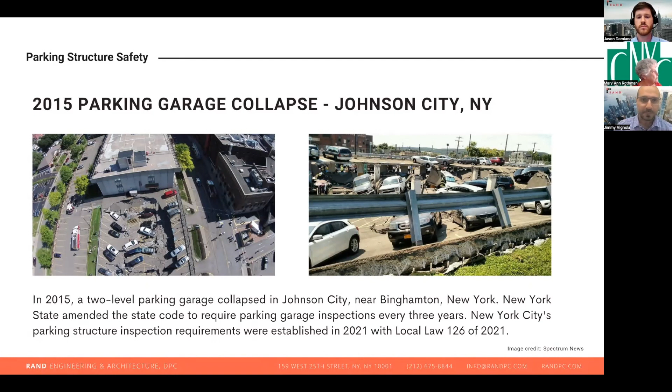So back in 2015, there was this collapse here in Johnson City, near Binghamton in New York, and this incident prompted New York State to institute a law requiring that all parking structures be inspected every 3 years. Those inspections in New York State rolled down to New York City, and eventually New York City put their own law in place to also require the same thing. So any garages outside of New York City are also now required to be inspected by a qualified person on a regular basis.

That went into gear in 2015, and all garages at that time were required to have an initial inspection, and then every 3 years after that. So every garage in New York State should have had their initial inspection by 2021, and they have to maintain this permit to operate. There are some exceptions: 1 and 2 family houses, townhouses, and parking lots.

The rules of the inspection program are very, very similar to New York City. We'll get into those. But one major difference between the city and the state is there's no state authority that we submit these reports to. They have to be submitted to the local authorities, like the village of Elmsford or the city of New Rochelle. They might have different rules and regulations between the towns in New York State.

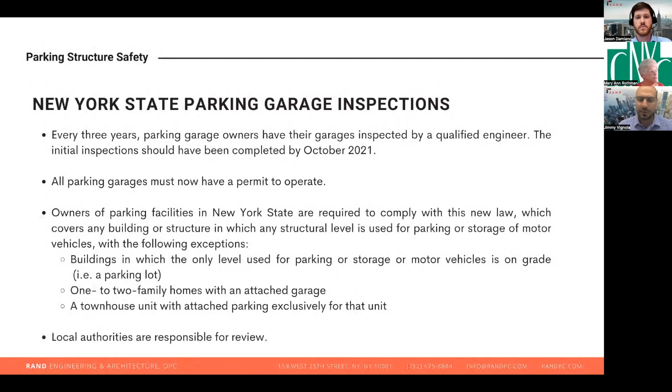I can't say we have experience with all of these agencies outside. There are many of them outside of the city, but we've done a handful of these inspections, Dobbs Ferry, Yonkers. So we're happy to help with those. But basically, the idea is the same as the city.

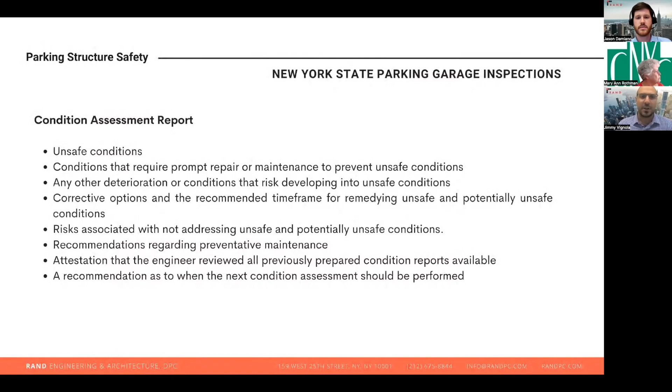At the end, we have to identify unsafe conditions. We have to identify and make recommendations for repair and maintenance. We have to give a time frame for those repairs. We have to assess risk and talk about the previous report and make sure that anything that was required by a previous report has been done at the time of the follow-up inspection of the second cycle. So very similar at the end to New York City.

So the New York City program, we have begun referring to this, the New York City Periodic Inspection of Parking Structures, as PIPS. That moniker is kind of coming in. A lot of people are still calling it Local Law 126, but New York City DOB is now using this PIPS moniker, similar to FISP, although they didn't put the program in this one, but more and more, I think you're going to start seeing PIPS, and it's definitely taking over in our office.

So I mentioned the Local Law 126. I know a lot of people are asking for a Local Law 126 inspection. Local Law 126 actually was the local law of New York City that instituted the entire 2022 New York City Construction Code. So it included the building code, the plumbing code, the mechanical code. There was a new article, actually in the administrative code, that instituted the parking inspection program. So 126 is a much more far-reaching local law than just referring to the parking inspection program. So DOB is bringing in this acronym, so we're adopting it.

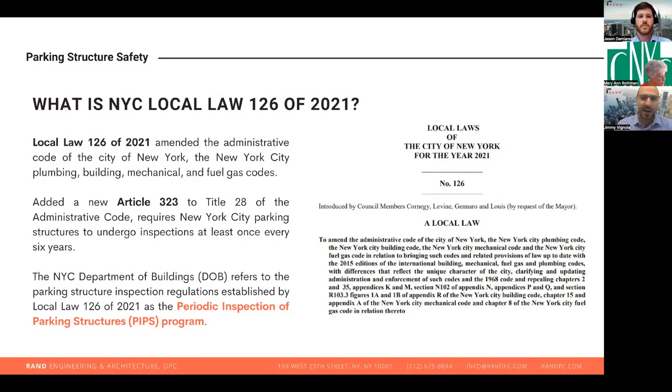So what does the law affect? Which parking structures are affected? Essentially, all of them. If it's in a basement, it's included. Any type of standalone garage is definitely included. Doesn't matter if it's open or enclosed. A lot of these parking structures don't have exterior walls. They're kind of partially enclosed. All of that is included. So any building or a portion of building, such as a cellar, basement, that's used for parking motor vehicles, is included.

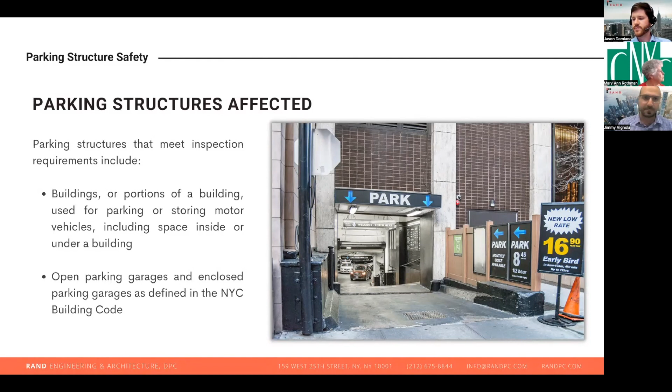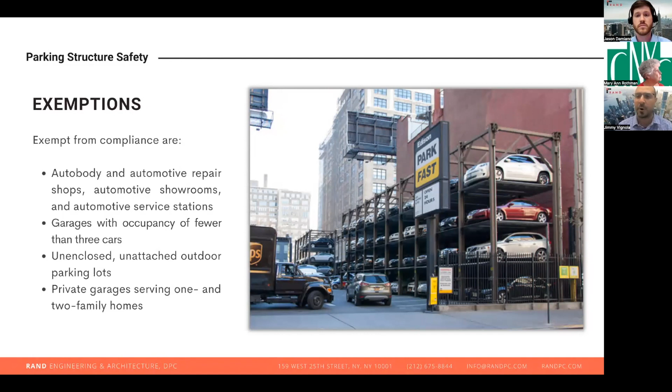So what's exempt? Auto body shops and auto repair shops are exempt. Garages with fewer than 3 cars are exempt, so 1 or 2. Parking lots, like the one you see pictured, are exempt. They do not need to be inspected, even if they have these mechanical lifts in a parking lot. 1 or 2 family homes are also exempt, as well as loading docks. We recently found out that loading docks are exempt from this, even if you have parking for 8 vehicles.

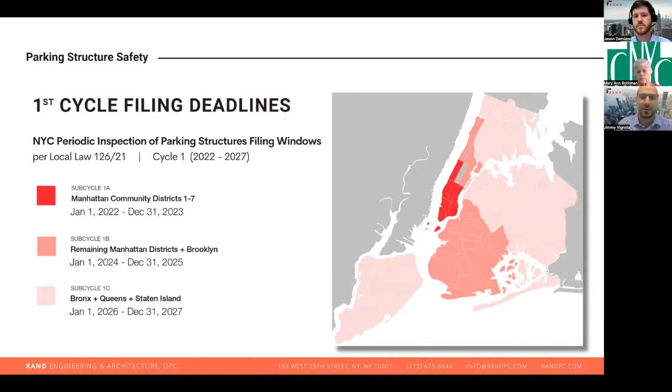If there is new construction in these areas, we always get the question, do I need to file? You need to file. All parking structures need to have an initial inspection within 6 years of their initial TCO or CO. So if you have a new construction and that 6-year window falls within the filing window associated with the location, you do need to file. If that 6-year date falls beyond your window, you don't need to file. So basically, for an initial filing in the lower Manhattan area, your initial TCO would have to be in 2017 or earlier for you to be required.

So it gets a little tricky there, but if you have a question, you can feel free to contact us and we will help you sort your way through it. But the key is the date of the first CO or TCO, and then 6 years from then, are you in the filing window or not? If you pass it, then you'll file cycle 2.

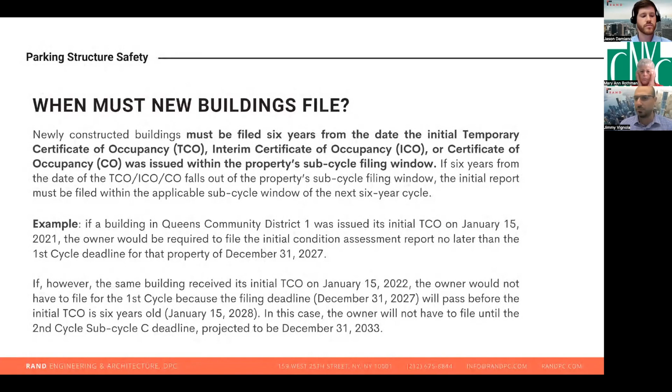Some of the rules and regulations, right? The rules of the City of New York is the place where most of these things reside: what the inspection program requires and the report. So every 6 years, right? The most important thing is that the person doing the inspection is a qualified parking structure inspector. We call them QPSI. Jason is one.

So this is the key. Even if you didn't want to come to RAND, please make sure that whoever you were talking to is a QPSI. That is the most important thing. The DOB vets us when we apply to be a QPSI. You need to have 3 years of experience with parking structures specifically. You need to submit your resume.

You need to give them a list of drawings, a list of projects that you've worked on, and then there is an interview with multiple people from the DOB. They grill us about our experience and what would you do in this situation. So it's something that you have to work for to actually get this qualification. So make sure whoever you are talking to is a QPSI. If not, the report's going to get rejected and it won't be worthwhile.

So the QPSI must put together this condition assessment report. The bottom line of the condition assessment report is that we classify each parking structure as safe or unsafe, or the middle category, which is where we normally wind up, is safe with repair and/or engineering monitoring, SREM.

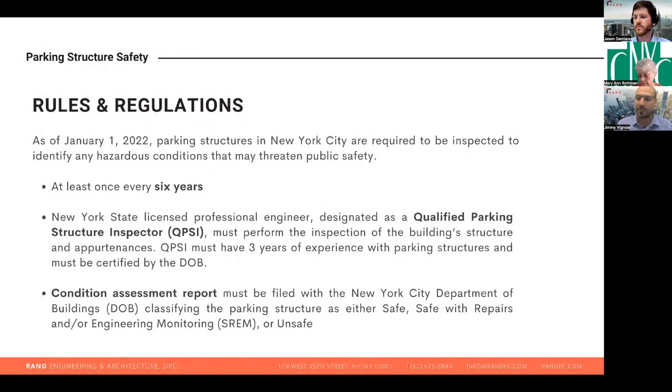This is very similar to SWARMP if you're familiar with the FISP program, which most condos in Manhattan, New York City are. So a lot of similarities with the FISP program. I'll refer to it a lot, but this is the bottom line that we're looking for in this condition assessment report.

So as part of the inspection, we have to review previous documents, previous reports, PIPS reports. Right now there are none, but in cycle 2, we'll be checking the cycle 1 reports. We also have to look at any structural drawings. We check violations, and we are supposed to review FISP reports where the facade is part of the PIPS report. So what does that mean?

The facade of the structure may or may not have to be included in the PIPS inspection. It needs to be included in the PIPS inspection if the parking takes up more than 50% of the building. So your typical Manhattan parking garage that's in the basement of a 12-story building does not need to include facade inspection, right? Your building is in FISP, you can basically exclude that part of it.

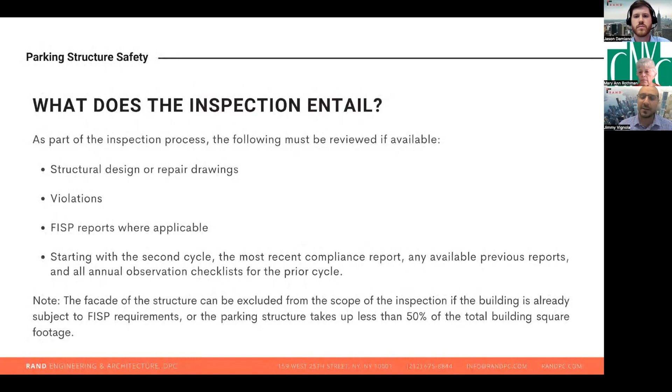If there is a standalone garage, whether it's 2 stories or 4 stories or 6 stories, I don't know, we haven't run into any of those parking structures that tall, but a standalone parking structure building, we need to inspect the facade as well as the interior.

So we have to develop this condition assessment program. It needs to be specific for the structure, right? This is the no walk-by, no drive-by inspection rule from FISP, right? We need to actually go there, and we need to consider the materials and the condition and the age of the building and the performance of the building, and decide how to assess this building. Is it well maintained? Is it not? What do we need to do?

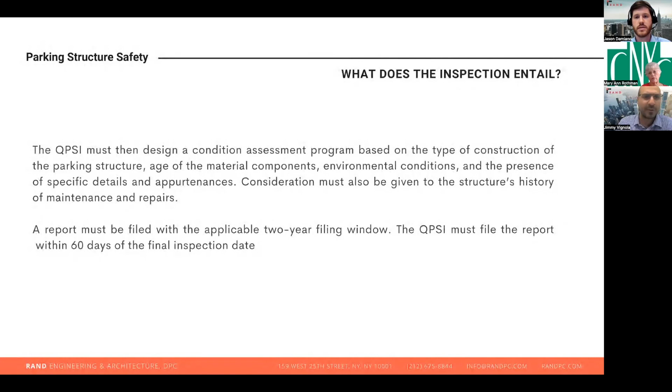If we get into this more, we have to review all aspects, all details, and the appurtenances. So we have this visual, right? The process starts with a visual inspection. We'll have somebody walk through the building. This is when we're gathering information about materials, conditions, performance, as I mentioned.

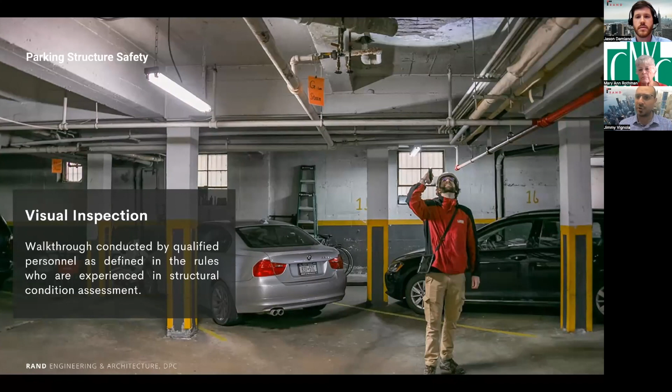It's really important that you have somebody that's experienced in structural assessment go out there, walk through, and then it is required that part of the inspection include physical examination of at least 10% of each type of structural element. So 10% of beams, 10% of slabs, 10% of columns need to be physically examined in some way, shape, or form. So physical examination can be pretty simple.

It can just be sounding. You see here in this photo, our office, we have these tools, we invested in these tools, they're kind of like little rollers, and we can go out during the visual walkthrough and we can sound columns, we can sound overhead slabs, we can sound floor slabs, and that counts as physical examination.

So if you have a garage that's in very, very good condition, you might only need sounding in order to meet this requirement. If there is more severe deterioration, you might need probes. We might need to do some GPR scanning, and at the high end, we might need some cores for testing.

So the physical examination really could be, there's a big range of what that can mean, from really simple, you might not even realize we're doing it if everything is in good condition, to being very, very intense, needing contractors and testing labs.

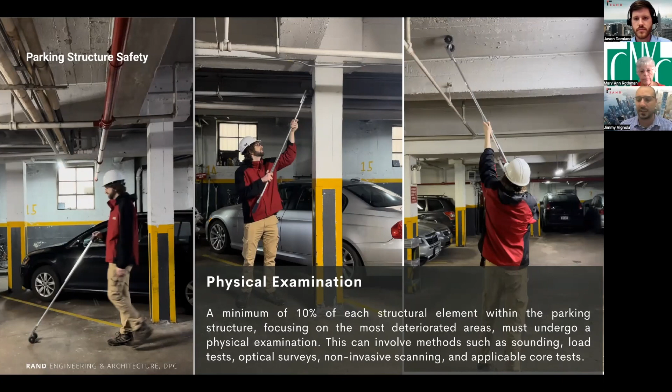After doing all of the physical examination, we have to do some structural analysis, determine what our recommendations are, what needs to be repaired. There's a final inspection. The final inspection needs to be done by the QPSI. The initial inspection does not need to be done by the QPSI necessarily. So that's okay to do.

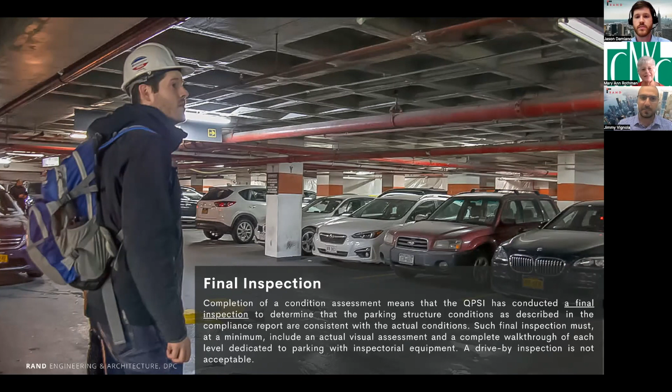But basically, once we kind of have an idea, get that initial check, do some physical examination, we'll have our QPSI, Jason, visit the site, do the final inspection, make sure everything is matching up, and take the next step. And that would be writing the report, right? So now we have to write our report. The report requirements are pretty specific. They're right out of the code.

We need to describe the structure, the gravity, and the lateral load resisting systems. We need to do a structural stability analysis of the typical and the worst case conditions. So those are a little bit different than the FISP program. If you're used to FISP, the PIPS program actually requires that we do structural analysis. DOB wants to see our calculations. So if you have drawings that show us the structure, that helps a lot.

We might have to, in some cases, actually ask for probes just to expose the structure so that we can do the structural analysis to prove to DOB that the structural stability is intact. That also can be very challenging when there's a lot of deterioration, right?

Sometimes our analysis might show that you need shoring and that you need temporary protection, right? If we encounter a lot of bad conditions and the analysis says the structure is not stable, that's going to be an unsafe, and we're going to have to work on that right away. So that's a little bit different.

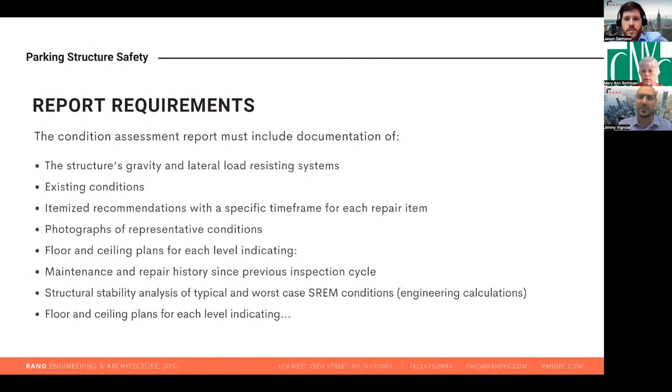Sometimes it might be 6 years, right? If we think it's okay, this can stay till the next cycle. We also need to include photographs of representative conditions, including safe, right? We need to give them a full kind of catalog of photos of all different types of structural elements and appurtenances, including the safe ones.

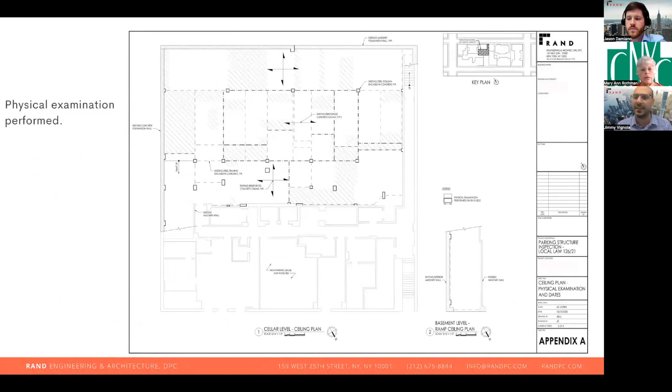This is what the floor plans look like that we are submitting. This is basically a map of where we did these 10% physical examinations. And then this would be the second set. This is actually showing the SREM conditions. There's a crack here, spalled concrete in other locations, active water leaks, things like that, right?

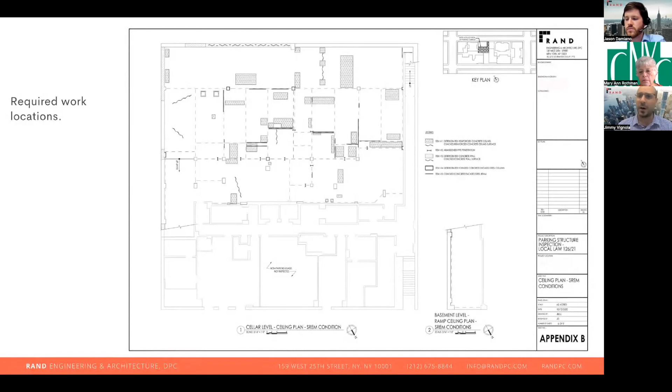So it does take some time to prepare these drawings, to prepare the reports, the photos. If you have a proposal for a $2,000 PIPS, they're probably underestimating how much work it's going to take them. There's work involved. If you have drawings, any kind of drawings, of course, that's going to help the QPSI get this thing going.

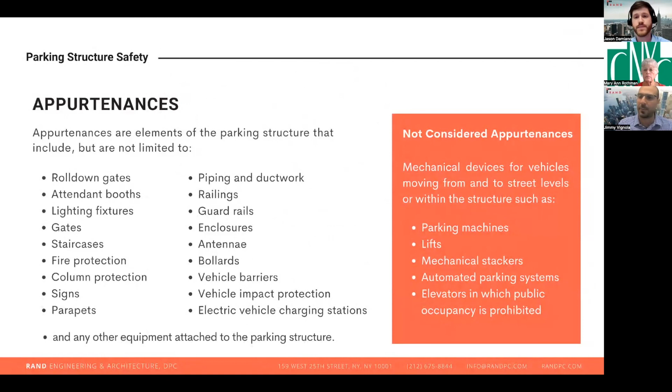I mentioned it a couple times. Appurtenances are also part of the inspection program. We need to look at all of these things: lighting fixtures, bollards, vehicle guards, attendant toll booths, looking for unsafe conditions or repairs that need to be made. There are a few things that are excluded, including the lifts and elevators. But really we have to look at everything that's part of the parking structure.

So we developed this, it's part of the report, but you are responsible to make sure that this is done annually. Rand, happy to help out our clients, would do these if you want to engage us to do that. It is not required to be by us. It can be by the building super, someone knowledgeable that you trust to be able to do this, but you must use the checklist, and you must have these checklists on site in case the DOB shows up. That is a requirement, right? DOB can ask for these anytime. You're supposed to have them on site, and then we need to include the filled out completed checklists in cycle 2.

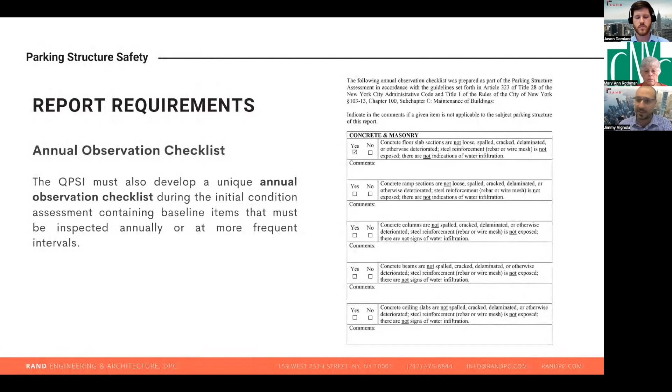So what are the filing classifications? Not too hard to figure out. You've got safe ones, everything is okay. There's not so many of those. You have unsafe, where there are hazards that are presenting an imminent danger to people or properties that need to be repaired right away. And then you have the middle ground, where there are things that need to be repaired so that they do not become unsafe, right? DOB's criteria for SREM is that it is a condition that needs to be repaired in the next 6 years to prevent it from becoming unsafe.

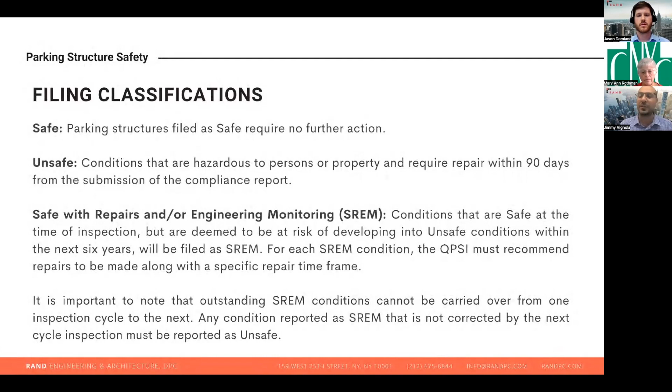So there's some judgment to that. But essentially, any sort of loose overhanging material is going to need to be addressed right away. That would be considered unsafe. We'll get into more of those details. Also, similar to FISP, something that is SREM needs to be repaired before the next cycle inspection. If not, it just automatically becomes unsafe. So we try to take that into consideration when we're figuring out what is SREM and what we can get by with calling safe, because those are the only options.

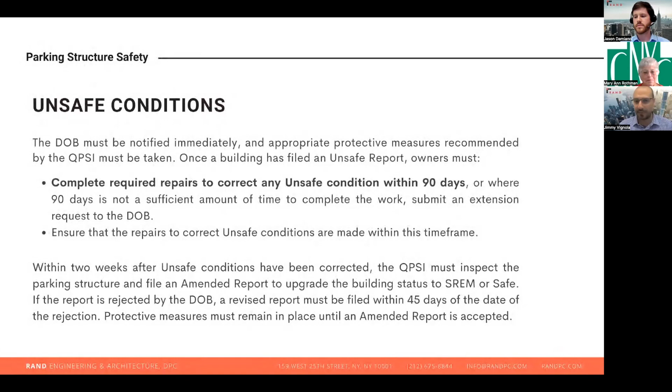Unsafe conditions, like I said, need to be fixed right away. We're supposed to notify DOB of an unsafe condition, and you are supposed to initiate repairs right away. The unsafe conditions are supposed to be addressed within 90 days. You can get extensions for those 90 days. The QPSI must apply for those extensions as well. And then once all of the unsafe conditions are addressed, they have at least been brought to SREM, if not safe, the unsafe report needs to be amended by the QPSI. So, a new filing. There are various timeframes involved that we have to meet, but we can always get extensions.

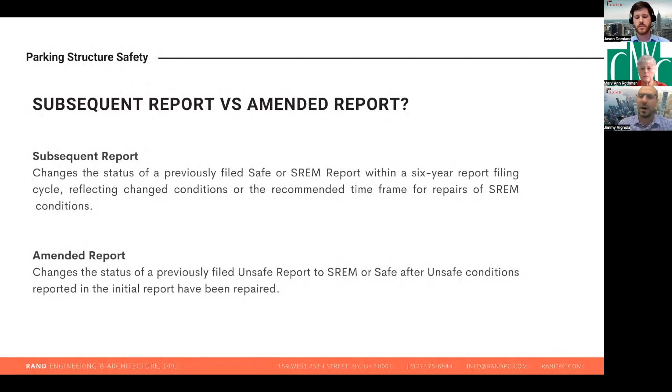The amended report is the one that really is critical, because that is the category that takes an unsafe to a SREM or a safe. Nobody wants an unsafe hanging around. In fact, you have to change it. You're not allowed to leave it unsafe. With a subsequent report you can change to safe from SREM. Sometimes it's not really worth it, or we make other modifications like changing the time frame. So if we want to revise a report, that's called a subsequent report.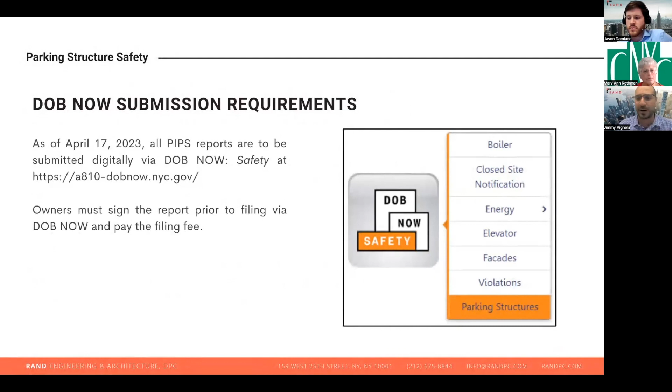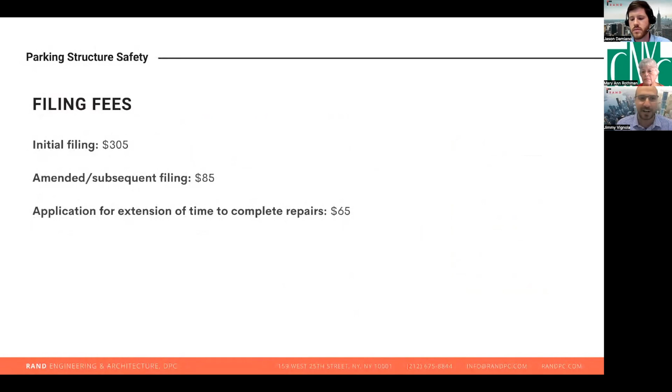All the reports as of April 17th of this year need to be submitted via DOB NOW. I think most people that are managing properties, owning properties, working in construction in the city at this point are somewhat familiar with DOB NOW. But this does require owners to go into the DOB system and sign things and pay fees, similar to FISP or any other alterations or repair projects that you might be doing. There are fees for filing, $305 for an initial fee. And for an amended or a subsequent filing, there is a fee. So that's why I was saying sometimes people don't really want to do the subsequent filings, because they'll save the $85.

There are penalties with this program, just like everything else, right? Late filings, failure to file, failure to correct unsafe conditions, you will get violations, and the violations can add up if you don't act on them. So of course, when we're working with you, we try to avoid the civil penalties.

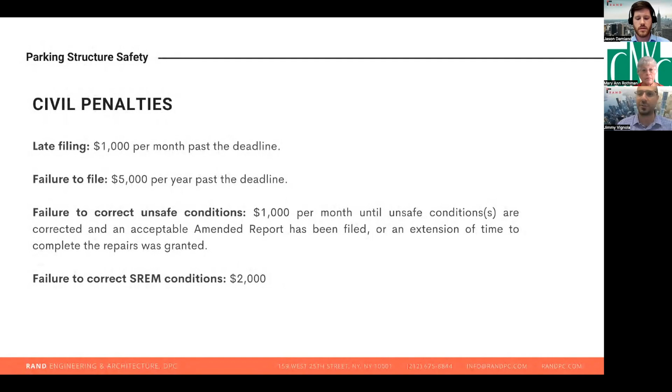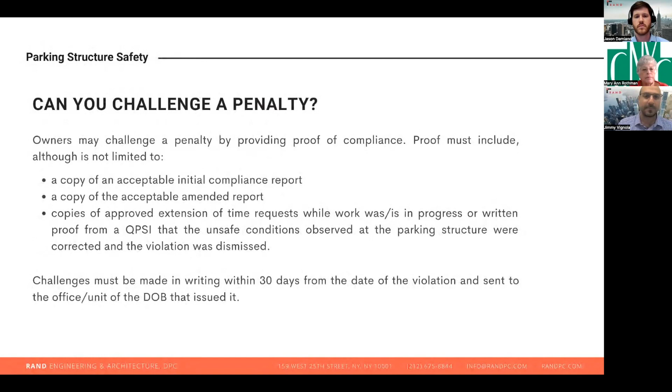But they are out there. If you get a penalty and you don't think you deserve a penalty, you can challenge it. You do need a QPSI to do that, to challenge that on your behalf. That's kind of the outline of the program, what goes into it, the administrative side of it.

Going to turn it over to Jason. Jason will talk about really what he's seeing in the field, things that he's running into, both in the conditions and actually with the approval process. We've gotten a handful of the inspection reports accepted at DOB now. So we do have experience and understand better what the DOB is looking for from our reports.

So I will turn it over, but before turning it over to Jason, I think we have one question in Q&A, Mary Ann. Yes, we do. The questioner has asked, is there a list of contractors approved by the city to do the repairs if needs be? I haven't seen a list of that. I think any contractor is qualified to do it. As long as they're a licensed New York City contractor, they would be acceptable. So there's no further qualifications required on the contractor end for these jobs.

Jason, as our QPSI, will you be talking a little bit about contractors and bidding and maybe getting sources of contractors? Not specifically, but pretty much any PE who works in this space is going to be able to get a list of contractors that are working. So now we can let you proceed with your half of the presentation. Yes. All right, thank you.

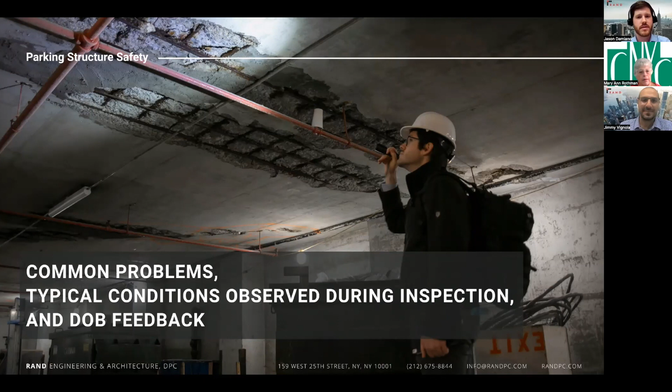Yeah, as Jimmy mentioned, I'm going to get into more specific things that we've seen in the field. First, I'm going to start with some common problems that we see in parking structures. Most parking structures are concrete or at least have concrete slabs in them. The number one thing that we see that is causing problems in these garages is water and de-icing salts that are brought in by vehicles.

Water can be brought in year round, but specifically in the winter, there's de-icing salts mixed into snow and ice and rain that is brought into the garages, and if there's no protection of the slab, that gets into the slab. It causes deterioration of the concrete itself, of the steel inside the concrete, and that problem just gets worse and worse over time. There are also external sources of water, like subgrade through foundation walls, groundwater conditions.

A lot of parking structures are subgrade structures, meaning they're underground, and some of them are built even below the groundwater table. And a lot of them are also built below plazas and terraces. So that's just another point of access for water to get through if those are not properly maintained or not properly waterproofed.

Another issue that we see within the garages themselves is ponding of water and poor drainage and lack of waterproofing. So a lot of garages have drains in them, but as we'll see on the following slides, if there is not waterproofing and if the water is not able to get to the drains, you end up in a situation where the water is just getting into the slab, even though the intent is for water to go to the drains. There's also a lot of previous repairs in these spaces. Garages need maintenance over time. It's a very common issue, but those are often weak points for future repairs.

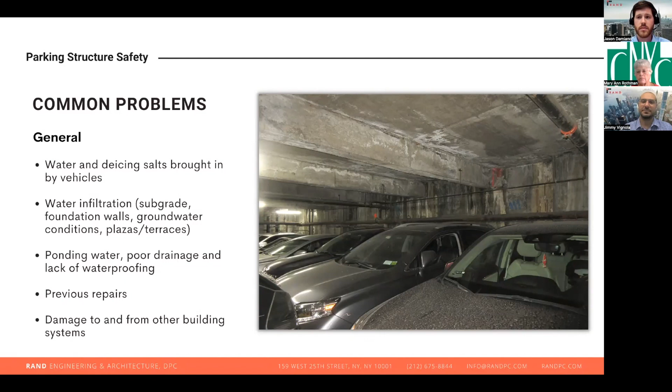And these types of issues can cause damage to other building systems, like mechanical systems or electrical systems that are going through the garage, and they can also be damaged by other systems. If there's a leaking pipe or something, that can also bring water into the space. You can have situations where there's just high moisture in the air because of some adjacent mechanical space.

The issue is once the concrete starts to deteriorate, the water is never going to make it off the cars and into the drain because it's just going to go down into the cracks, which eventually become concrete spalls. So even though this might look like a pretty typical garage condition that might not be at first glance a major concern, this slab

And you can have situations where you have a localized failure, which just means that slab is deteriorated to the point that it fails, but it can actually cause a major issue for the superstructure because the slab is bracing the column. And if you have an unbraced column, you have a situation that can lead to a larger structural failure.

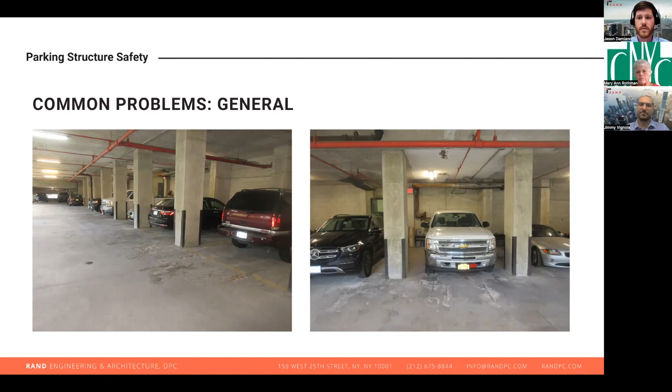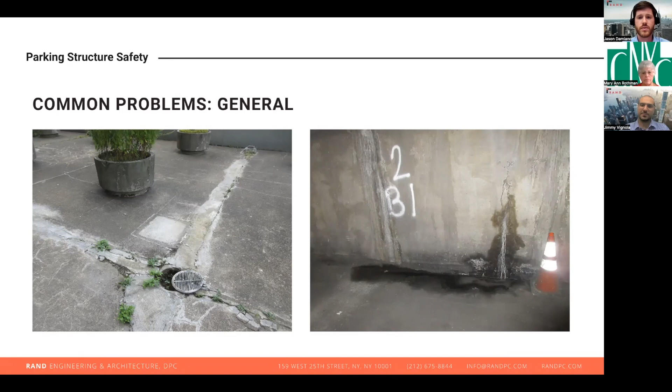And then on the right, you see a situation where there's a through wall leak. That's a below grade structure with a concrete foundation wall. The water is getting right through the foundation wall, which deteriorates that wall, but also can deteriorate the slab where the cars are driving. So you have two issues with that that need to be repaired and are not necessarily related to water being brought in by cars.

The issue is it doesn't address the source of the problem, which is water infiltration. So the water is able to continue getting in the slab, and over time it continues to deteriorate the concrete structure. But unfortunately, if there's no engineer that's brought in to take a look, you're in a situation where this will just continue to deteriorate over time.

So these are two things we commonly see in almost every parking garage we go into that has some level of deterioration, but unfortunately these are generally bad signs and even accelerants of damage.

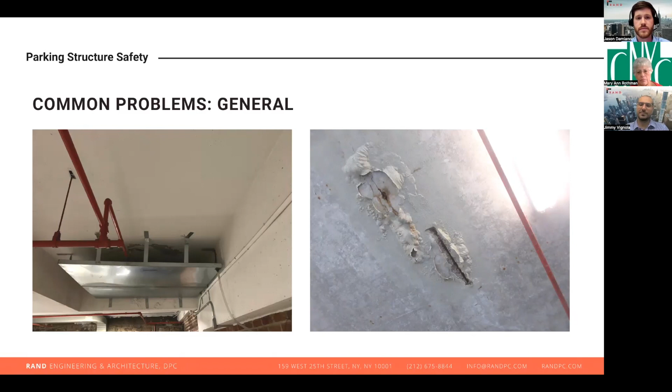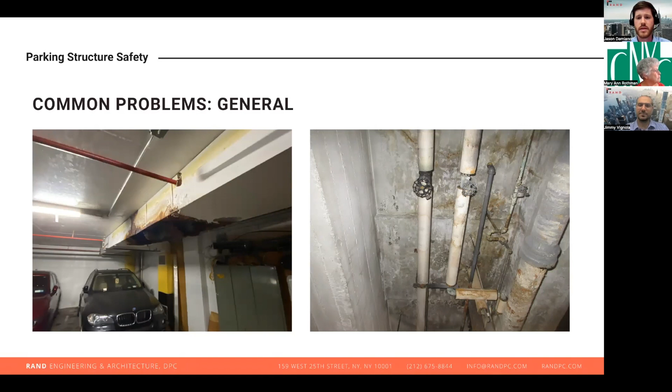And then on the right is a situation where, you know, a localized plumbing system, there's a mechanical room above this space, is actually causing damage to the slab. So that's the ceiling of a parking garage, but it is being damaged by the systems that are in place.

Unfortunately, that's not the best design because once water can get in to that conduit through a crack anywhere in the slab or along the line of the conduit, it's not only going to deteriorate the conduit, but it can travel within the slab and come out at a different location, causing a much larger spall area than you want to deal with. It's also dangerous for contractors. That could look like deteriorated rebar when in reality it's a live electrical line.

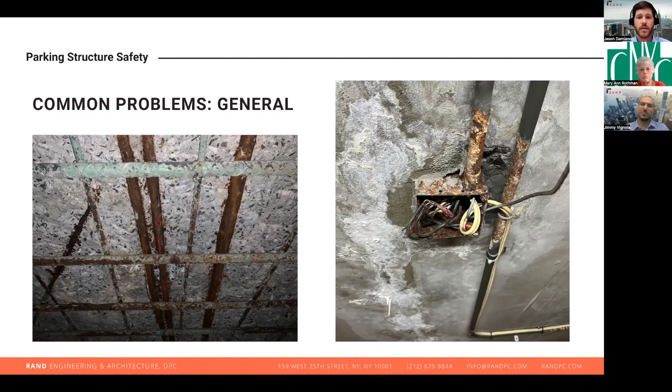And then on the right, you see a typical surface mounted conduit where the water is getting through the slab and the conduit is deteriorating to the point that it also needs to be replaced, and obviously the slab surrounding it is also in bad condition.

So to get into more specific, technical problems that we see in concrete slabs themselves, pretty much all the problems that we see in concrete start with cracks. Concrete naturally cracks. It is a normal thing to see cracks in concrete. Unfortunately, if there's no protection of that concrete, water is able to get into the cracks, and once it makes it to the rebar, it will start to deteriorate that steel.

Once the steel deteriorates, it starts to expand, and the concrete goes through a process that's called spalling. So the concrete will actually spall off of the rebar, meaning it separates as the rebar expands, and the concrete cover on the slab or beam or whatever it is will be lost. So it's definitely the most common thing that we are seeing in terms of deterioration.

Another common issue is the lack of joints. A lot of times joints are either not in the slab or not properly detailed, and it's just another thing that causes cracks and allows water to get into the structure.

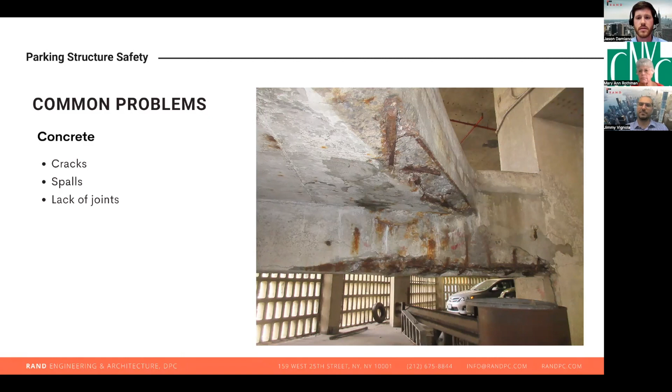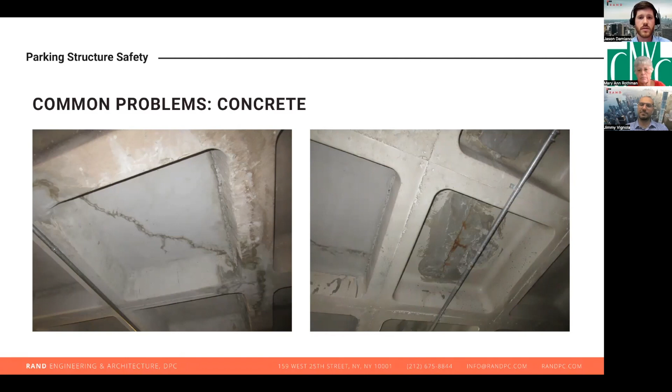You can see on the right, there's some rusting, deterioration of the steel or steel reinforcing within the slab. That starts to cause the concrete to spall, which means your repair is larger, your repair is more expensive. And eventually it starts to get to the point where it can cause structural stability issues.

So now you have a situation where an even larger area is spalling. So now you're stuck with a larger repair and a more expensive repair, and potentially a situation where the structure needs some sort of reinforcing or replacement because it has deteriorated past its capabilities.

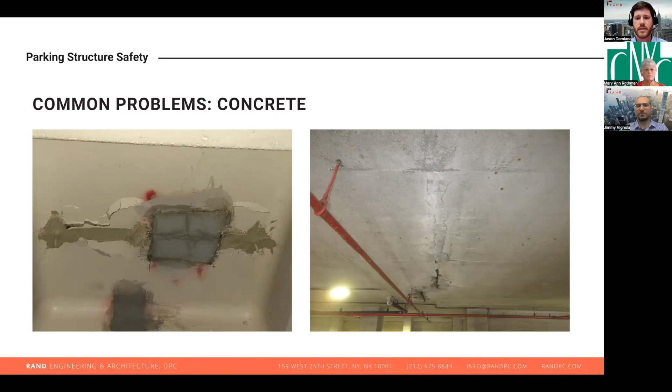And then on the right, you see kind of the full life cycle of a crack. On the top of the photo, you see the hairline minor crack that hasn't started spalling. Then as you get to the middle of the photo, the concrete starts to spall. And then towards the end of the photo, you can see the exposed rebar. The concrete spalls have been removed or just fallen off. And it's at the point where it likely needs a structural repair.

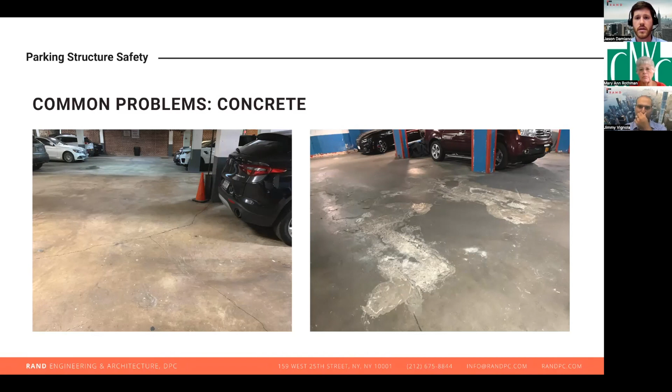It always looks a little bit different because the cars are driving on the surface and gravity doesn't pull the spalls off. So you kind of get this gravel and loose material. It causes tripping hazards, which are also an issue and something that we're looking for in these inspections. But either side of the concrete, if it's not protected, it's going to deteriorate in this way.

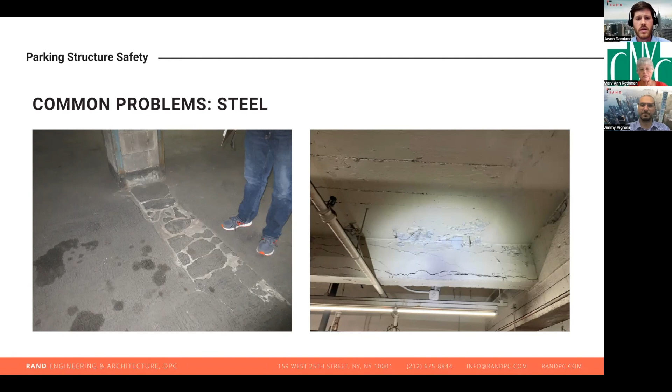encasement to crack. The encasement can get in pretty bad shape, but usually if the encasement's at the point where you're seeing major issues, your steel is likely pretty deteriorated. So it can actually cover up some of the issues, but this is an early sign that you have water infiltration getting to that column and that it needs to be addressed.

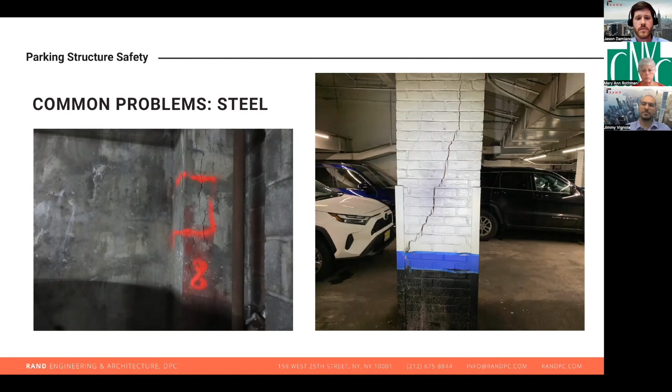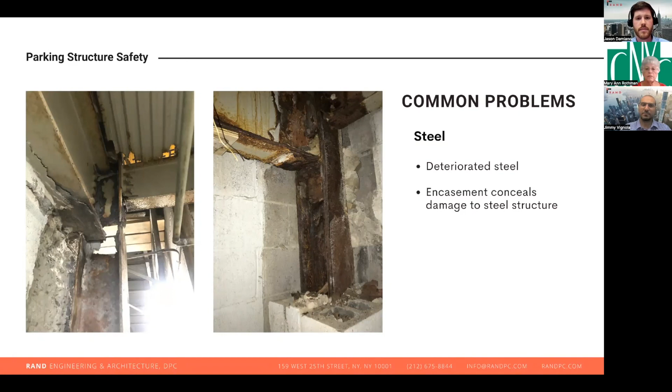So, for example, if rebar has lost 20% of its section, but it can still handle the loads that it was designed for, that's fine. But if rebar has lost 80% of its section, and we can't prove via calculation that that area can handle the loads, it is actually going to be an unsafe condition.

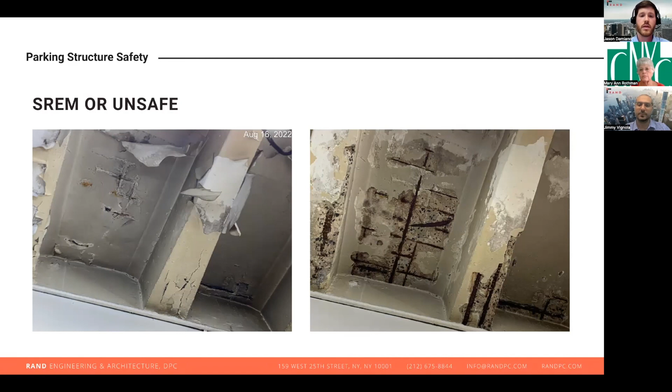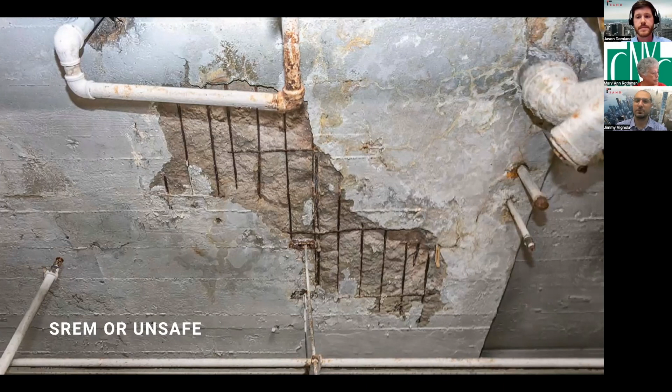So even though this is a situation where it hadn't collapsed on its own or anything like that, at the same time, we could never submit a calculation to DOB that would show that this could pass the stability analysis. So this is going to be an unsafe condition. We need to file it accordingly.

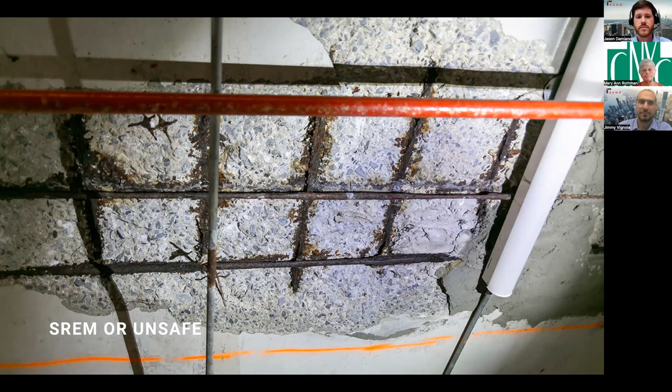So I'm going to pass it back over to Jimmy. I believe someone has their hand raised. Yes, Elena's hand is raised. Elena, did you have a question you wanted to ask? No, I don't have a question. Thank you. Oh, okay. Hopefully we answered it. Yes. So we have a little bit more in our presentation.

Just wanted to talk about the Ann Street collapse, right? I mean, this actually happened after the local law was enacted, but of course it drew a lot of attention. When this happened, in April, someone died. Several people were injured. Property loss, also significant, right?

So initially, when this happened, as whenever there is a collapse, we get flooded with calls. People are very, very concerned. I want you to come. I want you to check my structure. I'm afraid it's going to collapse. There'll be an investigation of this, but we know several of the factors that went into this collapse, right? And whether it's this collapse or the Surfside collapse in Florida a few years ago, the ingredients of these collapses are usually the same.

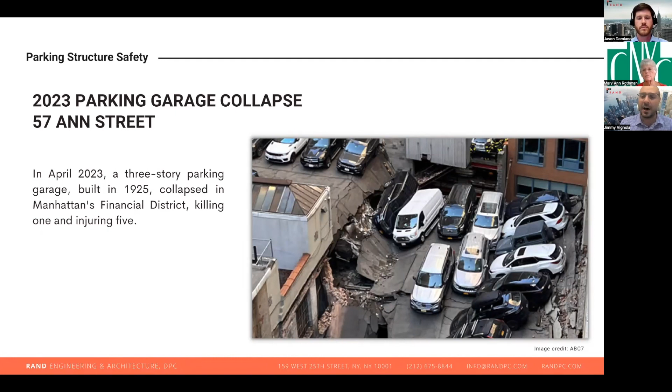And how did we get there, right? The building lasted for 100 years. Built in 1925, so it took 98 years for this to happen. And there were certainly warning signs along the way. One of them, again, lack of maintenance. We know that this building had at least 25 years of documented damage that wasn't corrected. So you have to maintain concrete structures. Concrete structures are not some sort of superstructure that is never going to deteriorate or you don't have to pay attention to. It needs to be maintained, and small problems become big problems.

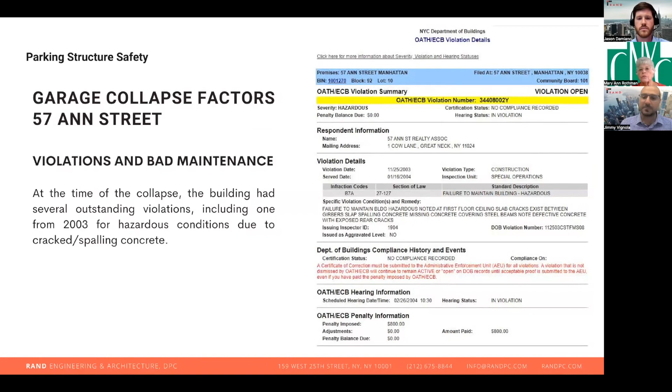The other thing here was the overloading of this structure, right? It was way too many cars for what it was designed for. They put in mechanical lifts, which were not allowed. If you didn't know, your C of O for a garage tells you how many cars are allowed to be parked there. The C of O lists if mechanical lifts are allowed. DOB is looking for that. We are looking for that, especially now.

If we go into a garage, even for a courtesy visit, if it is overloaded, we're saying, hey, C of O says you need 34 cars. You got 160 in here. You need to remove those right away. It's unsafe. DOB is going to shut you down. So be aware of that. It's on the C of O, and even more so than the violations that could come or getting shut down, it is a real safety hazard.

Collapses and structural failures, thank goodness, are really rare, right? When a building goes down, it's news. That Surfside collapse was worldwide news. It's very rare, but we know how they happen. There's always an element of lack of repair, lack of attention, lack of maintenance. And there's very often an element of overloading these structures, of somebody asking the structure to do something that it wasn't intended to do. So we're on the lookout for these. Those are things that you should also look out for if you're worried about the safety of something.

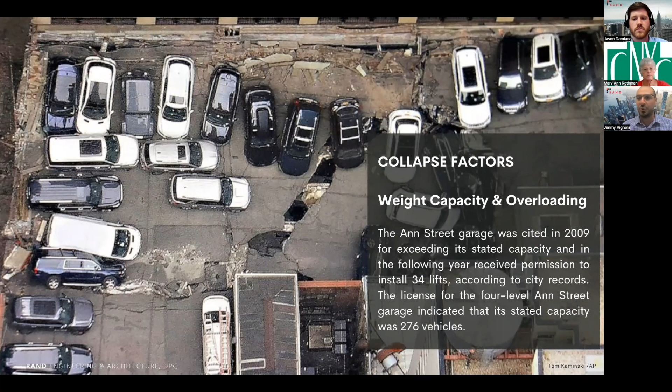You might see a crack here or there. Maybe those things aren't cause for concern. But if you know that nothing has been repaired in that structure for 40 years, now you can get more concerned. So we want to address those. And then we know that out of that, DOB obviously reacted. Jason, you want to jump in here, take us to the end?

Yeah, as Jimmy mentioned, DOB has been going around to many garages and issuing violations. It's been a constant theme since the tragedy down on Ann Street, and it's just something to be aware of. They haven't been closing every garage. There's different remedies for each violation, but we're certainly seeing an uptick in focus on this issue.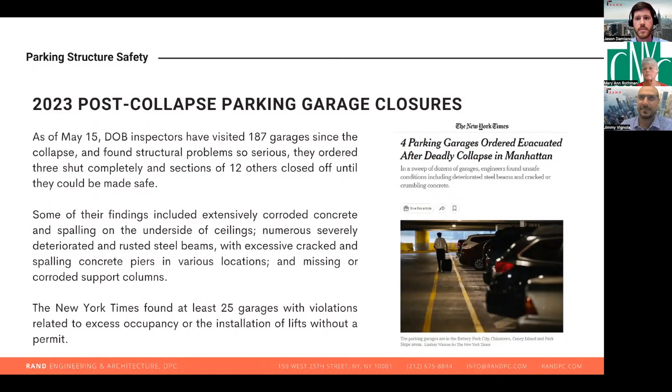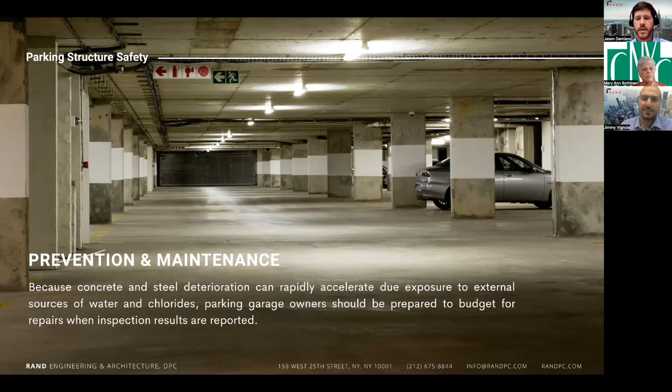So the final thing we're getting into, just three quick slides here on prevention and maintenance. We talked about all the things that can go wrong with concrete. We talked about how the main issue is water getting into the garage, mostly brought in by vehicles. We're just going to go through quickly recommended repairs and what to do about it.

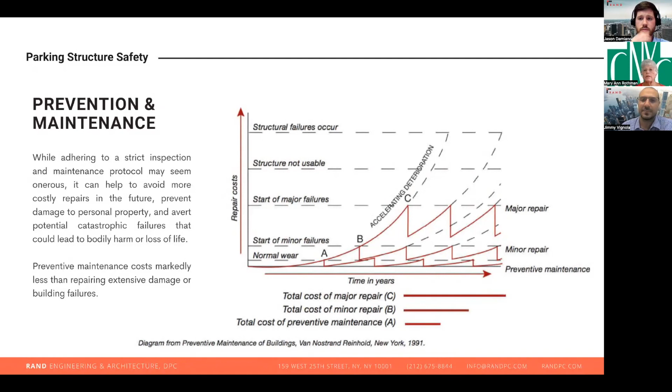And then the number one thing, once you finish a repair program, is to make sure you install a traffic coating system. It is a waterproofing system that can be placed throughout any garage. It will protect the slab. It will prevent water from getting to the concrete. It will go off the cars onto the coating and into the drains. A lot of buildings are going to be doing major repair programs over the next few years. If you can finish that by getting the traffic coating in, then hopefully next time you're just doing minor repairs to a traffic coating.

And the final thing, just keeping track of drainage and making sure your drainage system is okay. A lot of drainage systems, especially if they haven't been maintained, are in pretty bad shape and can cause ponding and other issues. And just make staff and management aware of the issues and what to look for, and if they have a question, bring in an engineer. That's the most important thing to prevent a worst case scenario. And that wraps it up for us.